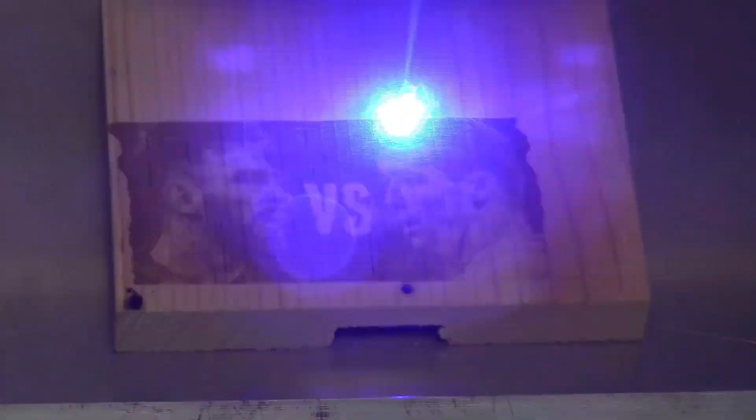Hi guys, today I'm going to start my new project, the laser engraving machine. So this is my final design. I think I might make some mistakes, which I will realize later when I assemble the machine together. But let's just continue. This is the linear bearing I showed you in my last video's design. It's more symmetrical and easier to put together.

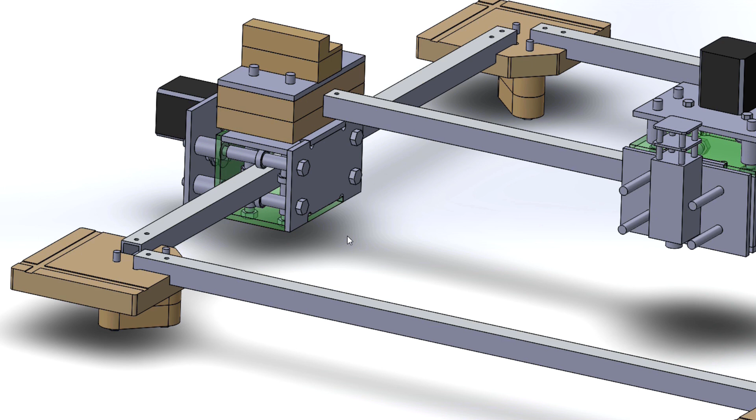But one of the viewers told me one very valid point: this version might have less stability in the rotational orientation here. For this problem, I don't think I need to be concerned on the y-axis here because it has this bar to stop it from rotating. But on the x-axis, it might be a problem and make the machine less stable.

So I might need to put more skate bearings here instead of one only in the middle of the rail. I'm going to put two, each one close to the edge of this tube, so it's going to be more stable in the rotational orientation, and it will work the same in the linear orientation.

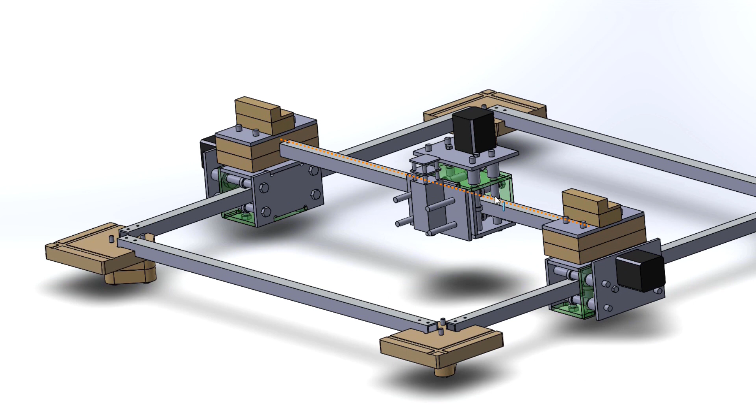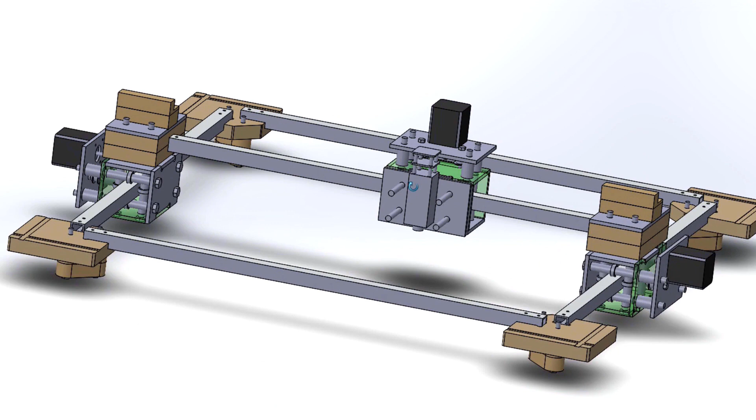That part I don't think I need to show you how to do, because I already showed you in the first version. I'm just going to have three spacers here instead of two, to space out these two bearings, one on this side and another one on this side, so it's going to be easy.

Okay, and the next step is I have to trim the aluminum square tube to equal length. These two need to be the same length and these three will be the same length, but to make it easy I'm going to cut all five of them to the same length. So I will show you my trick to do that.

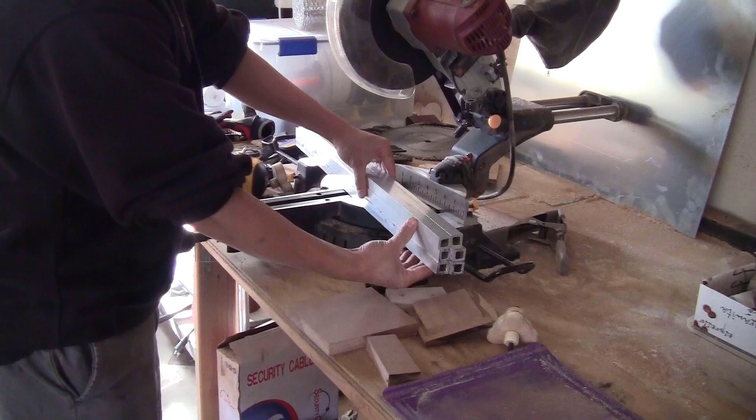Okay guys, so I have here 5 pieces of aluminum square tube which I bought from the hardware store. They are roughly about 25 inches in length. They're not exactly the same though, because you can see here it's not exactly the same on both sides. So what I'm going to do is trim them to the exact same length.

To do that, first of all I'm going to tape them together so they don't move when I cut them. So I'm going to use some masking tape here and tape them really tightly together.

Okay, so now I'm going to make sure that it is well fixed here. I'm going to trim a little bit just on the edge, to make sure that it will cut through all the tubes. So I'm going to do it like this, and I'm going to use a C clamp to fix it down so it doesn't move.

And to cut this, I'm going to use an abrasive blade instead of the toothed one. It will cut more smoothly and safer.

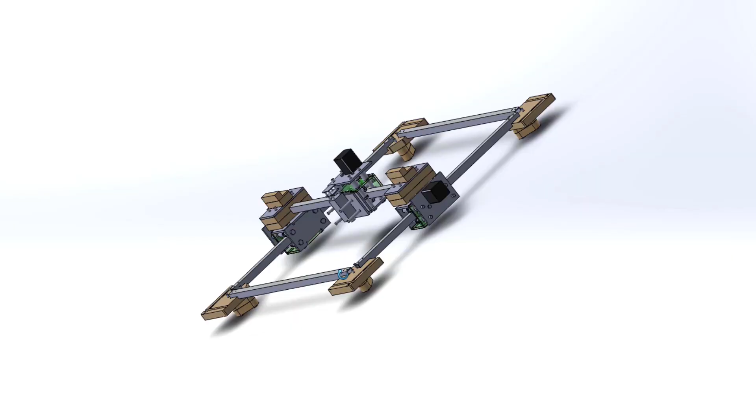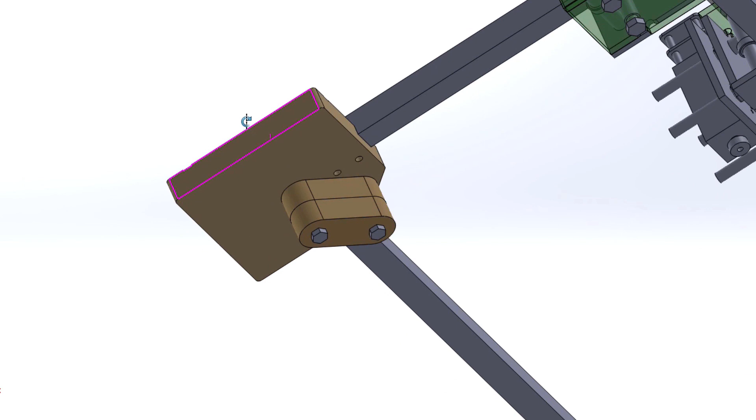Okay guys, so now I have all the tubes here trimmed to the same length. The next step is to drill the holes here, which have to line up with the hole on the corner bracket. Look from the bottom here, you will see the hole here. So I'm going to use some M5 bolts to go through this hole and lock this with these tubes.

At first I thought I'm going to drill the holes at a size of like 5 mm, so the bolt will go through, and use nuts to lock the bolt and the tube here. But I think if I turn the nuts too tight, the tube will be kind of deformed and not going to be square anymore.

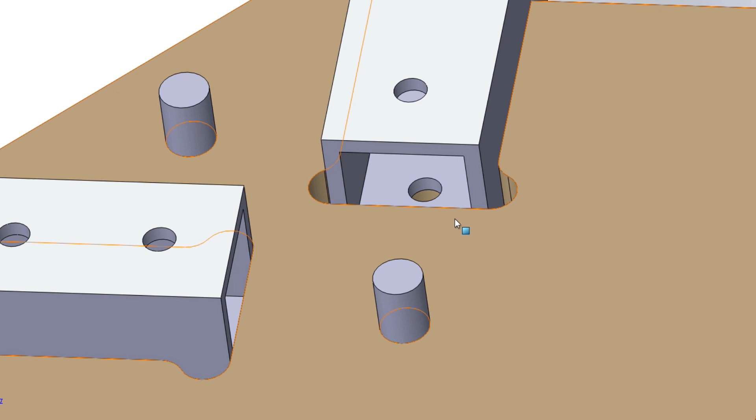So what I'm going to do is drill the holes here with a 4 mm bit, and then make the thread using the M5 tap, and then I can lock it down using the M5 screw. It goes from the bottom and locks with the thread I'm going to create here.

Normally what people do is mark where to drill the holes and use the drill to just drill there. But I don't really trust my hand. Even if I mark the hole, my drill bit might just slide and slip.

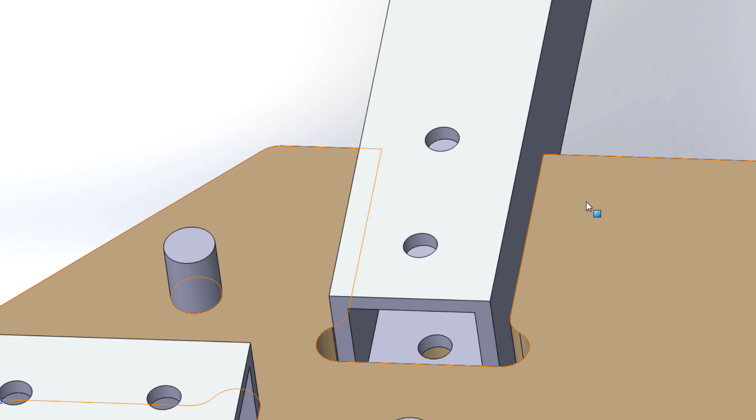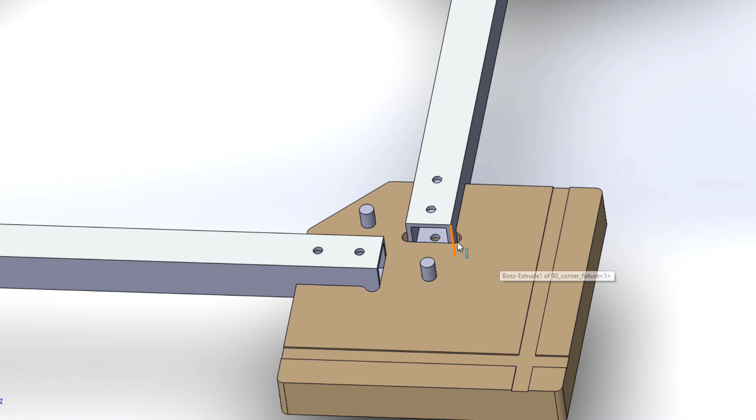So what I'm going to do is use the CNC machine to drill the holes, and I'm going to use a 4 mm bit. Then I'm going to use the M5 tap to make the thread. To do that consistently on all the tubes, I think I will have to design some type of fixture so I can swap out the tubes more easily and consistently every time. So let me just design that fixture first.

Okay, so here's the fixture that I designed. I have the slot here, just long enough I think so the tube is not going to move sideways. And then on the bottom here I have some slots that I'm going to slide some M6 nuts in, and the hole will go through, so I can use the bolts to go through this and lock with the nuts down here, and some bar to go across to lock the tube down, so it's not going to move up

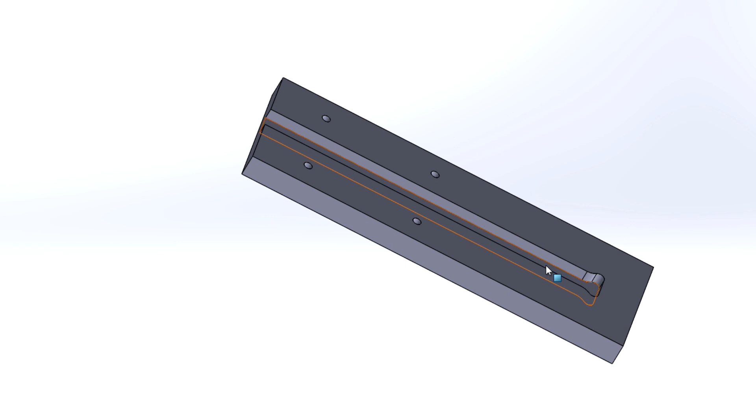and down. So that way it will stay in place, and then I can just slide the tube in, lock it down, drill the holes, so it will be stable every time, and the same on all the tubes. So let me just show you how to set up the milling of this in Fusion 360.

I think I'll only show you the Fusion 360 setup on this one. All the other parts will be kind of the same, and I don't want to make you bored with the process. If you have difficulties on any parts, just let me know. I might post some videos to support this process, but I think it will be easy. So let me just show you this part very quickly.

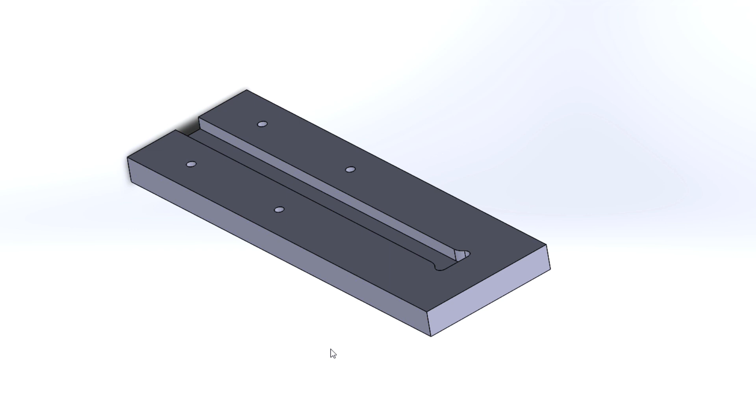Okay, so here in Fusion 360, what I'm going to do is open the part. Just click on open from my computer, and I'm going to choose the aluminum tube fixture for drilling. So I just click on that. Okay, so now this is imported.

What I'm going to do is actually mill the bottom first, those slots and the holes that go through here. The reason is after I mill this, put in the nuts, then I will flip it over and really fix this piece down so it's not going to move. I slide in the tube and fix the tube down, so I have to do it a few times. So I don't want this stock to move.

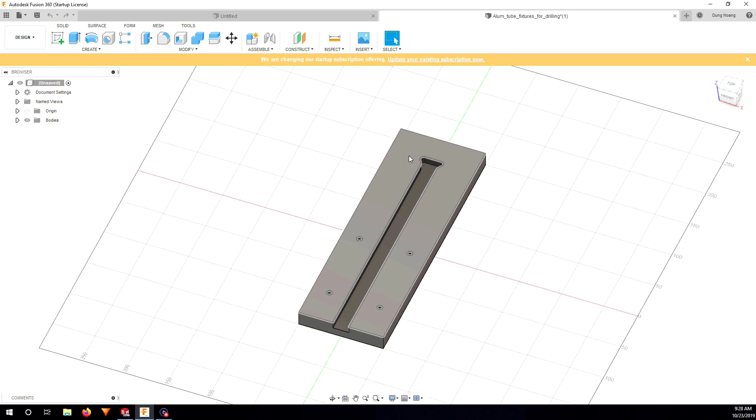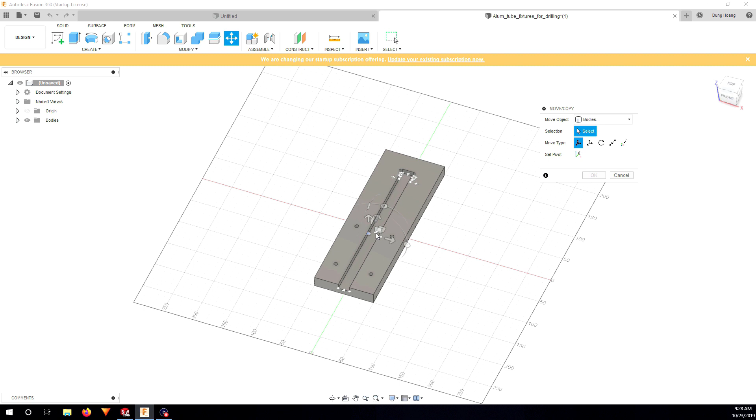That way, once this is milled, it will always be parallel to the y-axis, so it's not going to move, and it will be consistent on all the tubes. So let me just flip it over to mill the bottom first. So just click on this, move and copy to the middle here. No, wrong point. Okay, right here. I'm going to rotate in Y angle 180 degrees. Okay, so now it's flipped.

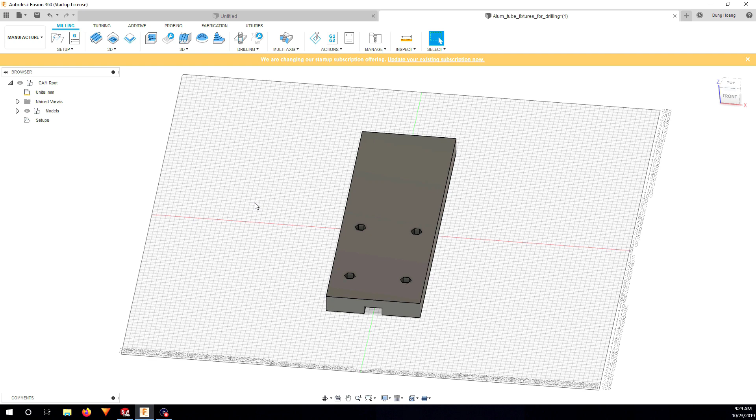I'm going to go from design to manufacture, and then define the stock. So just click on setup and choose the box point. I'm going to choose this one in the middle here, and on this edge. Go to stock. I'm going to put side offset about 5 mm. Actually, I don't need to. I put 0 and 0. So I click OK.

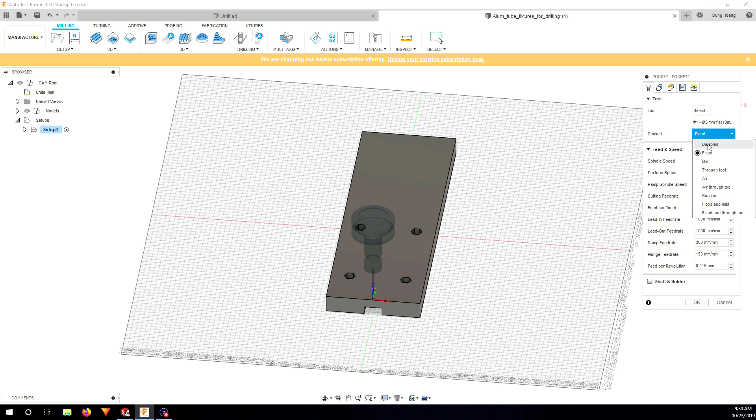Next step I'm going to go to 3D pocket clearing and select the tool. I'm going to choose the 3 mm flat end mill for this one. I don't need to choose anything because I just leave it as bounding box. It's going to find the pocket by itself, so I just leave this like this, and here put 4 2 so it goes a bit faster.

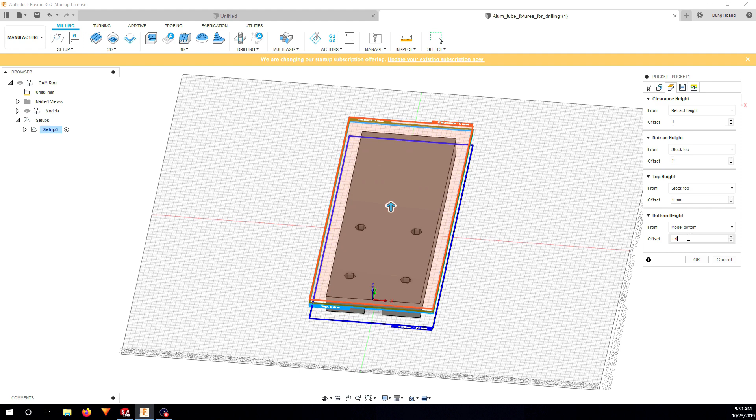This I'm going to drill all the way through, so I put minus 4 mm, and tolerance I'm going to put a bit more precise. I don't leave any stock. And do shortest path, and that's it. I click OK. Okay, so I think it's correct.

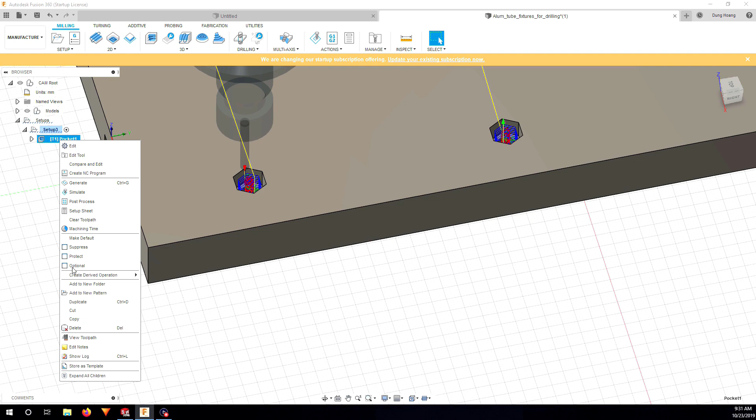Well, let's just check carefully. So it drills all the way through, and here it does the hexagon. So everything seems to be fine. So I'm just going to export this, post process, post. So here I'm going to save it in the folder. I'm going to name it aluminum tube fixture bottom.

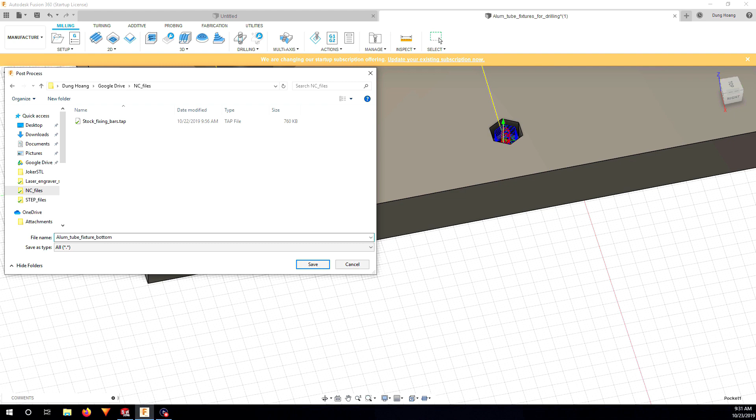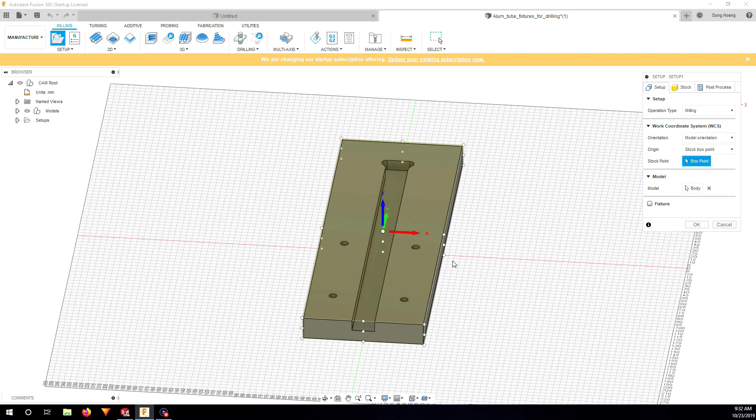Okay, so now the file is saved. What I'm going to do is press Ctrl Z a few times, so it goes back to the original position here. Okay, so it's face up. So now I just go back to manufacture and create the setup, and I choose the same point here. Then I go to stock, I put also the same and click OK.

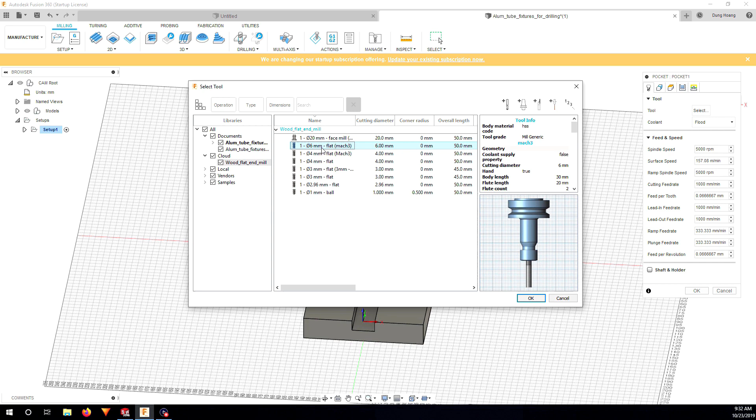Now I also just need to clear out this pocket. So once you set this up on the platform, just make sure it doesn't move, it really stays in place. It has to be stable, so all the tubes when you drill them, it will be exactly at the same place. So I just go to 3D pocket clearing again, and then select the tool. Actually for this one I'm going to use the 6mm flat end mill because it makes it a bit faster, so I click OK. And this one I might just reduce the speed a bit, make it cut a bit smoother.

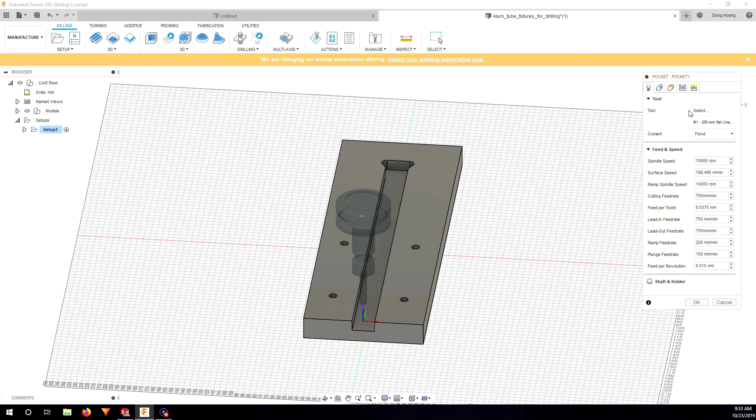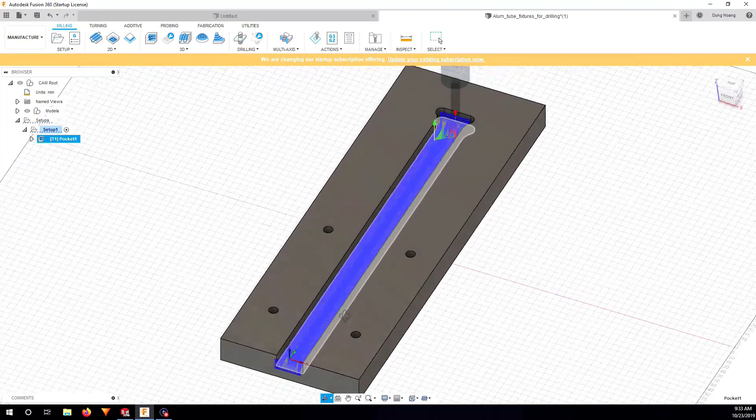Okay, it looks correct. It's going to just mill all the pocket here. So now what I need to do is just export it and go downstairs to mill this. Okay, I'm going to put it top.

Okay guys, so to mill this fixture I'm just going to use this scrap piece of wood. The size of it is about 30 centimeters length, and as long as it is more than a centimeter width, it will be fine. So I'm just going to line it around here, so that way when I push the tube, I will have enough space here. So let me just fix this down, mill the slot for the M6 nuts first, and then I will flip it over. So let's just fix it here.

Okay, so now you have the slot milled. You just take some of the M6 nuts here, just pound them into the slot so they sink inside. I'm just going to take it on the floor and pound it in. Okay, as you can see here, I pounded in the nuts. It's not that hard. They fit tightly in here. The same way I made my wasteboard here.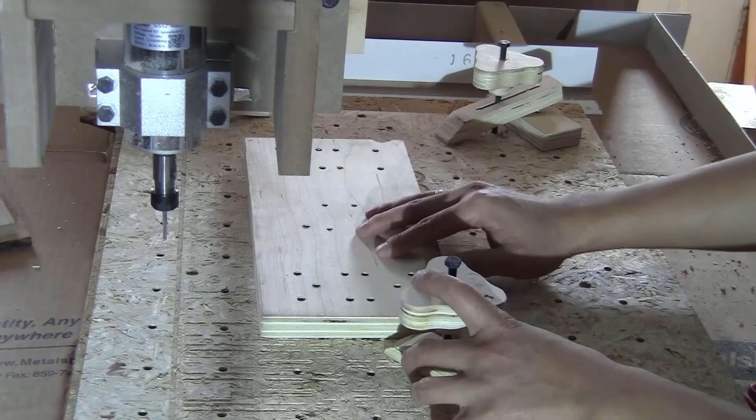So this time we need to really fix it in place so it doesn't move at all when I push the tube inside. And I will need to have enough space at the front, so it should be around here. Okay, so now I just want to really tighten it. Use a lot of this type of setup to fix it down and push on the side, to make sure that it doesn't move anywhere.

Okay, so now I just tried it on different tubes, and they all slide in very snugly and easy to put in. So the size of the slot is good now, so I'm just going to use this fixture to drill the hole. So let's just move on to the next step. Okay, so now I have the fixture ready. I'm just going to leave it on this setup until I am done drilling all the holes on all the tubes. So first of all, I just have to fix a tube here.

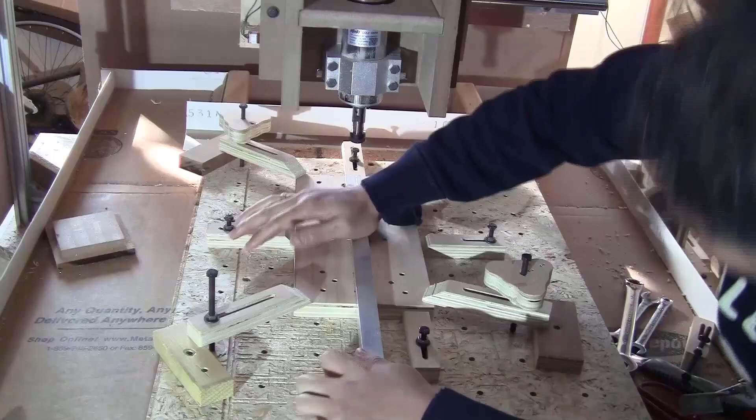Just slide it in. It's not very tight. You can just press it down all the way in this way and down. And now you can fix it down using this setup. Just have the screw down here. Okay, so now the tube is really tight in place. It's not going to move anywhere.

Okay, the next step is very important also. You have to make sure that you have your touch probe properly set up and the edge finding script is set up on your CNC, so you can find this corner. So you can drill it precisely right in the middle of the two holes that you need to drill. So to do this, I just use one of the broken bits that I had before, 4mm shank. I mean, precisely it is 3.96mm. So I just slide it in here and tighten it.

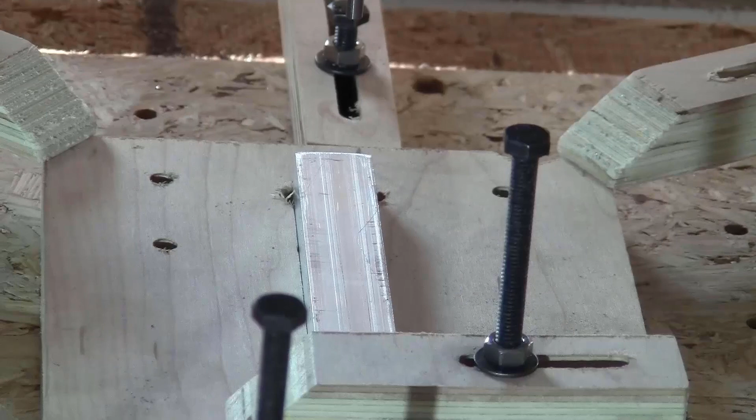Okay, one thing is a very basic mistake that I made. I forgot to clamp the probe here and put it here, so it was almost crashing and breaking things. Luckily I stopped it soon enough. So don't make that mistake. Make sure that you clamp your probe and make it touch the tube.

Okay, so now this corner is found. What I'm going to use to drill the hole is this 4mm drill bit. So I'm just going to put it in. Okay, so now the tip of the tool is probed to the surface of this tube. I'm just going to show you how to set up the drill of the two holes right in the middle of this tube on Fusion 360.

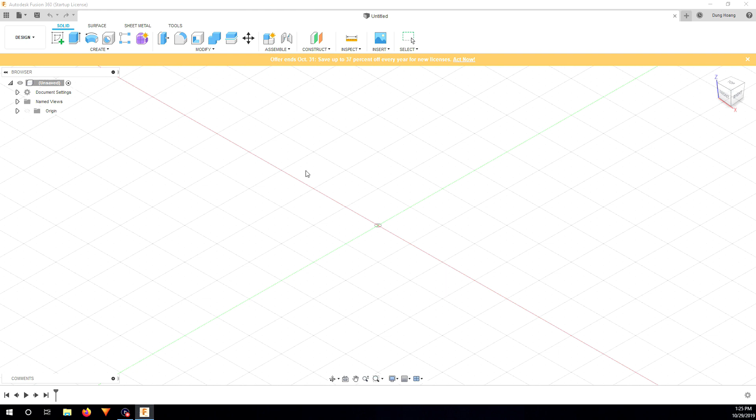Okay, so here in Fusion 360, I'm just going to open the aluminum tube. Okay, so I only need to go to manufacture and create the setup. For the box point I'm going to choose this point, where I used the tool probe to find the corner, and this I put 0 and 0. Okay, and I just click on drill, and here I choose the tool. I already created the 4mm drill bit here, so I click OK.

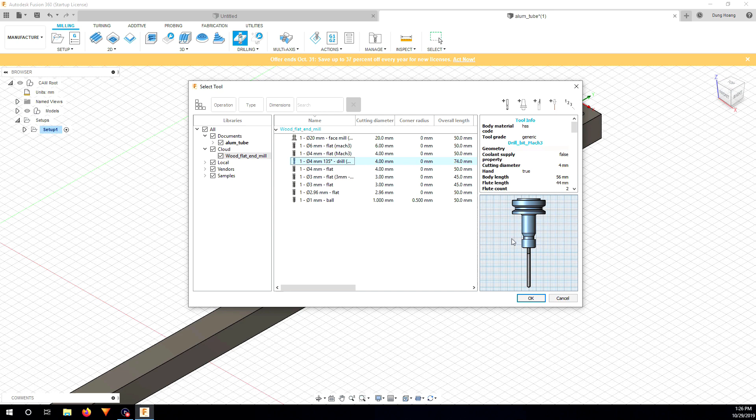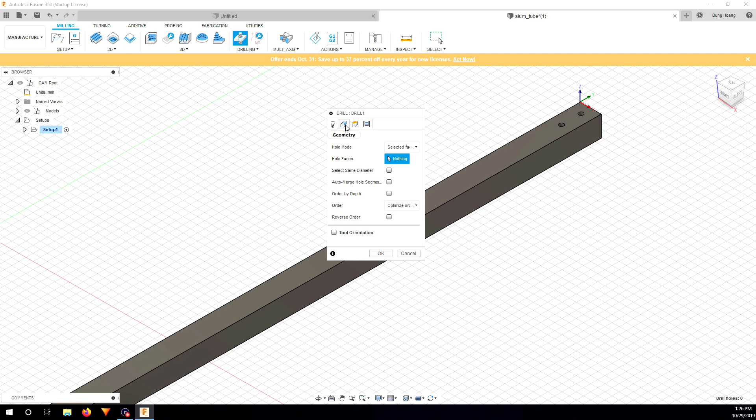And disable this. I'm going to go very fast. I go 10,000 for the spindle speed, and plunge rate I'm going to go very slow, 4mm per minute. To drill through this is about 3mm, so it's almost 1 minute per hole. It's not too slow. And here I'm going to just click on the hole that I need to drill, and that's it.

I go here, don't need to retract too much, and this one I put 0.5, and offset here. Well, first I'm going to check this because I want the drill tip to go all the way through the bottom, and here I put -1 to make sure that it drills through. Like this, it's going to go through because the edge here is about 1/8 of an inch, 3.1mm. So that's it. I click OK. Okay, so now the drill is set up. Let me just show you how it drilled downstairs.

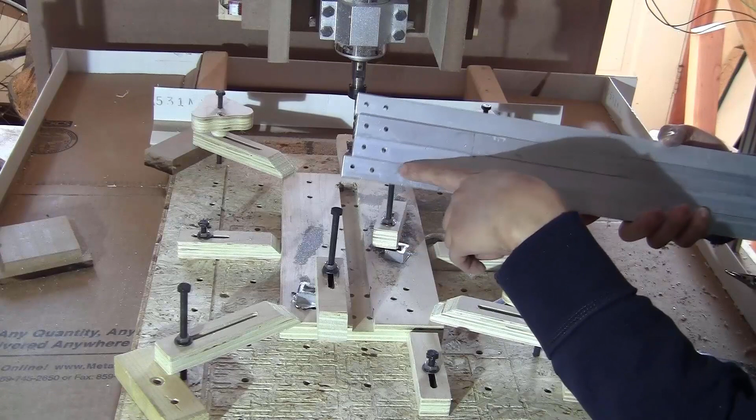Now I have all the tubes drilled the same way, so the holes are at the same position. Next step is I'm going to start to mill all the other parts, especially the corner bracket, to make sure that the holes are lined up. And I also have to make the thread on this. Okay guys, so while I'm waiting for the corner bracket to be milled, I'm just going to make the thread on those holes, and then I'm going to use the M5 bolt 0.8mm pitch to test the thread. So I have the M5 0.8 tap here, so I'm just going to do one by one.

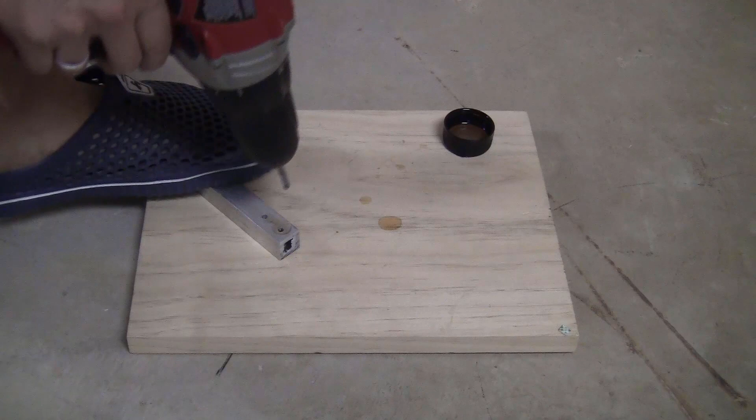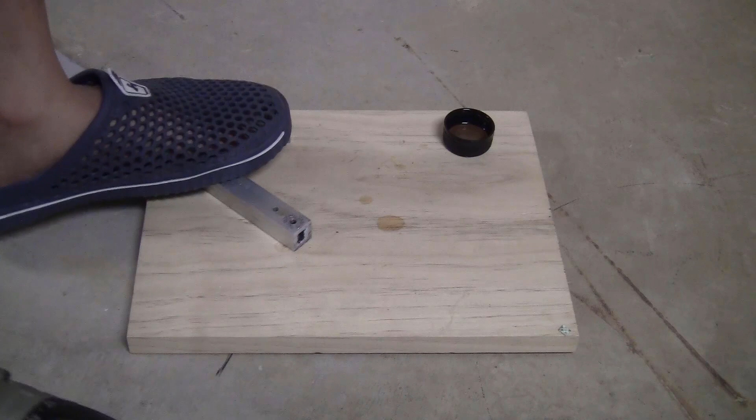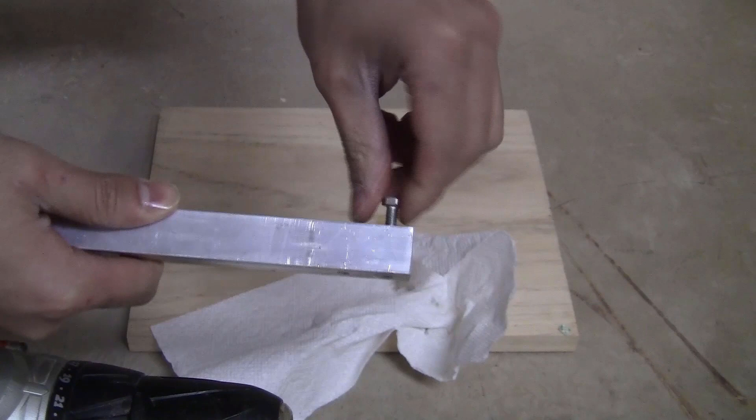So first of all, I'm just going to put some cutting oil on the hole, around the hole. Well, I put too much, but you don't need that much. You just need a little bit, so I just spread it to the other hole. Okay. Then just step firmly on it. You don't need to go high speed, just go actually pretty low, so it will go through. And when it bites, it just pulls it down by itself. Wow, perfect. So now the thread is done on this hole, so I just do all the other holes.

Okay guys, so last time after threading all the holes with the M5 tap, I found out that on some of the holes the screw just slid through the thread without any kind of friction, so the thread wouldn't cut well. So what I did is I had to run outside and buy a new set of taps that is a lot better, and I made the holes bigger, and I used the M8 tap to make the thread here. So I had to redesign the corner bracket and make the holes here bigger.

I also put some slots here to install the belt, which I will show you later because the belt installation is the last step. So for now the holes are bigger, but actually with the design that I share with you, I still keep it at M5. Because if you need it to be bigger, just use your drill bit to drill them, or you just change the design yourself. So feel free to change whatever you need for the material you have. So now I'm just going to show you quickly how to install those clips on the brackets.

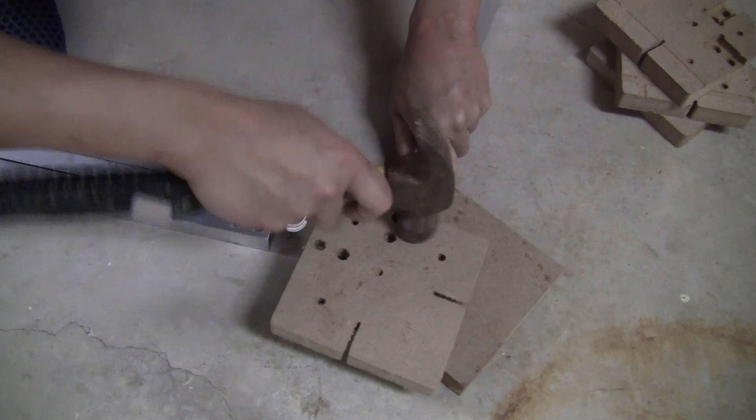It's actually a bit tight, and I actually like it this way because this way the clip will kind of stay snug inside and it's not going to move in and out. And I'm just going to use the hammer to tap it down a little bit like this, and just tap it all the way in.

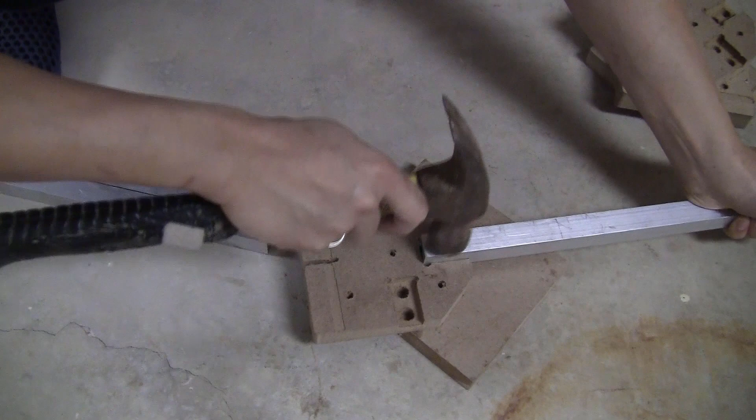So the holes are lined up kind of perfectly. I don't know if I can show you here. You can see that the holes are lined up. So I only need to take some of the M8 bolt here and then just tighten it. Okay, so it actually stays really tight here. So I don't think I need the bracket on top to reinforce it. I think this is enough.

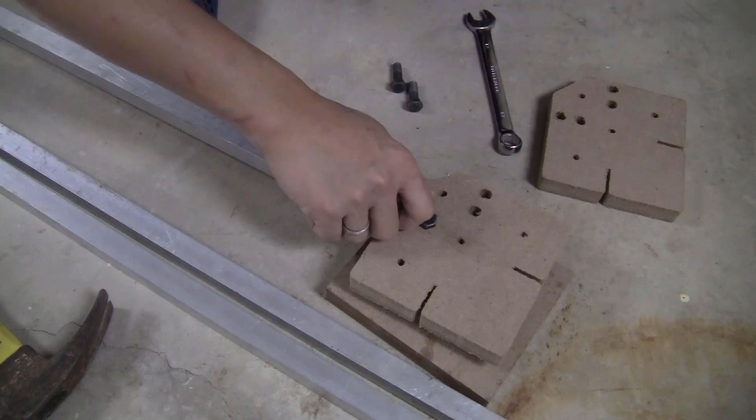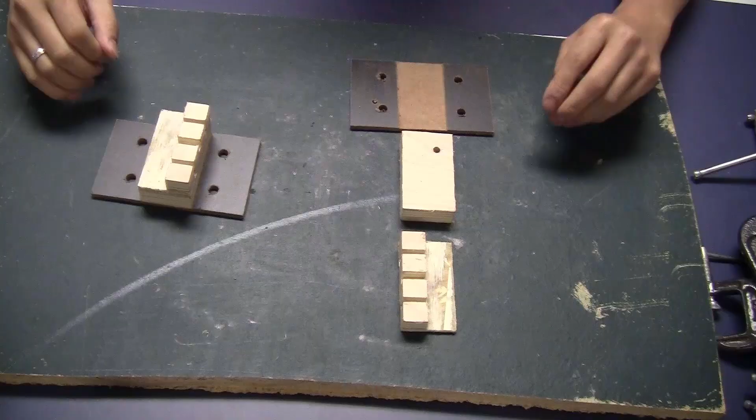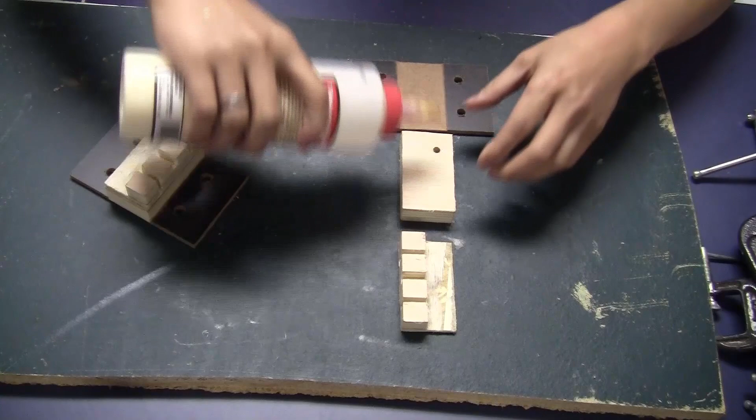Okay guys, so after testing the tube and the corner bracket, they were good. So now the next step is I milled out almost all the pieces I need for the laser engraver. And one of the steps is I need to glue some pieces together like this to have a big piece like this structure. So what I will do is I'm going to use some wood glue like this, and I just pour it on this piece.

Just spread it out and press this on, and then on this put a bit and put this piece on top. It doesn't matter which way you put it, they are all symmetrical. So you can turn it one way or the other when you install it. So now you just need to clamp it down.

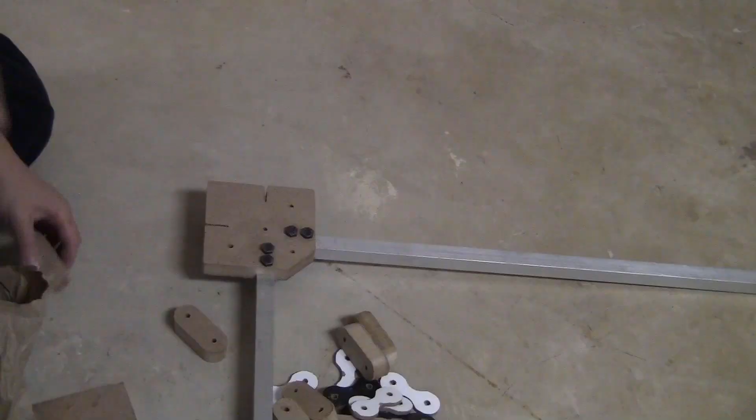Okay, so while I'm waiting for the glue to dry on the other piece, I've got to install the legs on the corner bracket. And to do that, first of all, just flip them over like this. So once I changed to the M8 bolt and M8 thread, I didn't realize that I reduced the space here, and the fit that I designed at the beginning doesn't fit anymore.

So what I did is I made some of this type of spacer so they can slide in here. So just lift it up a little bit like this, and then I install the piece on top like this. So I can still keep those, and I just need to make some of this. So if you still use the M5 or M6 hole as in the original design, you don't need these pieces. So for me, I just use some of the 80mm M8 bolt. So I'm just going to slide it through the fit. Well, I should put some of the O-ring on first.

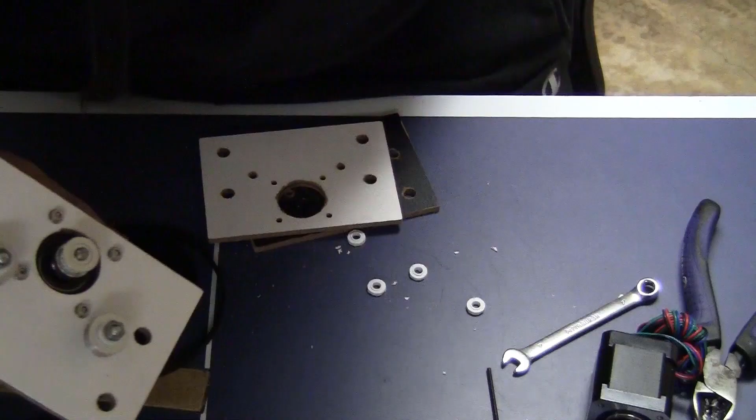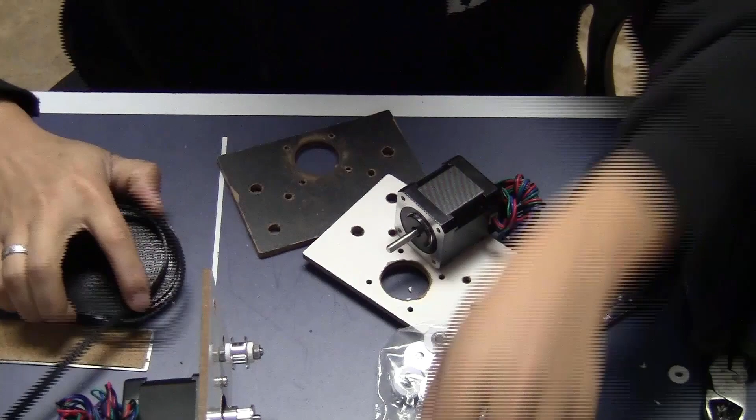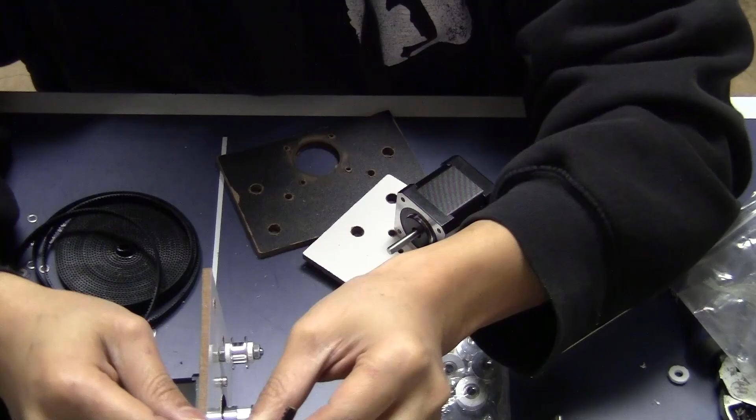Okay guys, so before putting the linear bearing setup together, I have to set up the stepper motor mount first. So it's going to look like this. So what you need is a NEMA 17 stepper motor, this plate that you mill down, and some of the spacer for the pulley. This type of pulley is for a GT2 belt, like this. It's 2mm pitch, and you also need a belt for it. So all of this is on AliExpress for very cheap.

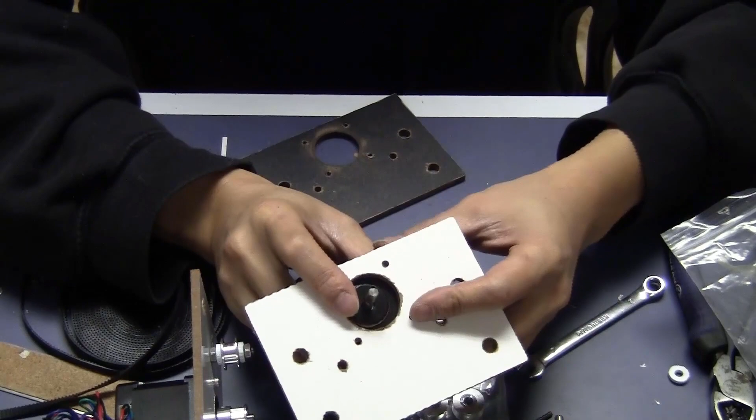So what you need to do is, first of all, take this and put it in like this. So you just have the motor mount here. Then take some of the M3 bolt here, 10mm length, and use the washer and slide it through the hole here and mount it.

Okay, so now the stepper motor is tightened. We need two of the M5 bolt, 28mm length. So just slide it through these two holes. Okay, and then just tighten it with the nuts.

Next step, just slide on this spacer for the pulley. I have the small ring just to push the inner part of the pulley. So like this, take out two of these, slide them on, and put another spacer here and tighten it with the nut. You don't need to tighten it too much, just enough so the pulley can still roll freely.

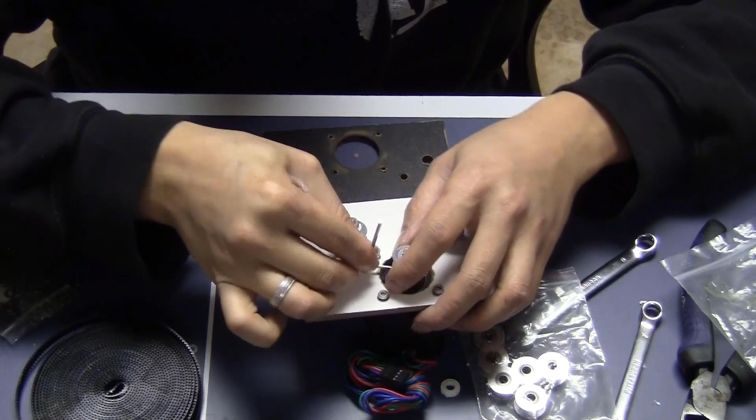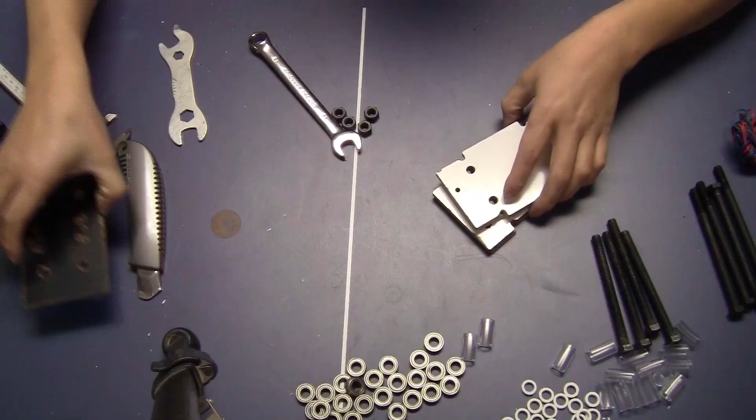Okay, so you will need like 3 of this setup: 2 for the y-axis and 1 for the x-axis. Okay guys, so I'm just going to start to assemble the linear bearing now. First of all, I'm just going to start on the linear bearing for the x-axis.

Okay guys, so now I have all the parts ready. So I'm just going to assemble the linear bearing setups, starting on the linear bearing of the x-axis. As you can see here on the side plate, I have 2 pairs. This pair has the distance between the holes a bit shorter compared to these 2. So I'm just going to take this one with the long distance here, and I take the M8 bolt

110mm length. And the reason I use those is because I tried to find one that's fully threaded, but the store that I went to didn't have it, so I had to take this one. This part is not threaded, but that's fine. So 110mm, just slide them through here.

Okay, so next step I just take the vinyl spacer with an inner diameter of 8 millimeters and slide them on here. The length of those spacers is 20.5 millimeters, but I cut them roughly 21 millimeters. That should be fine. Okay, so the vinyl spacer is on. Then slide on one of the hard plastic spacers. The small inner ring here should face up.

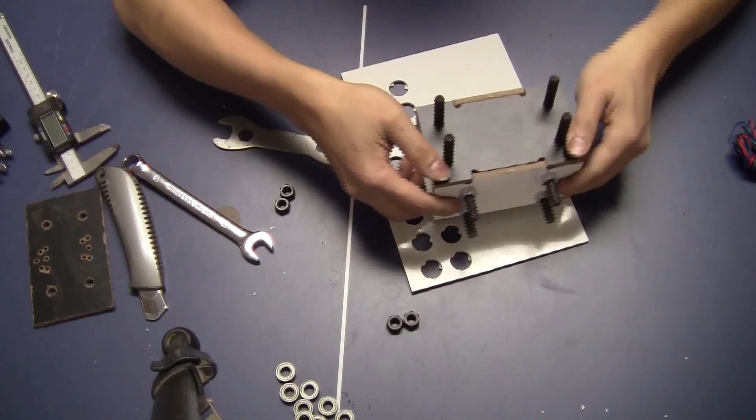Okay, so now I just slide them together like this, and pair up like this on this side. Now on this side I'm just going to lock it with the nuts. This side is roughly locked, so I'm going to lock this side too. This part will need some spacers, so I'm going to use this. Push it down. It's kind of tight, so just force it a little bit. Some are easy.

And then there's a 19 millimeter one, and then you need another 5 millimeter, because in total you need about a 24 millimeter spacer. If you have something that is exactly 24 or 25, you can just use one piece. But I only have 19 millimeter and 5 millimeter, so that's what I use. On this side right now, you can lock them temporarily with the nuts, or you can also just install the motor mount here.

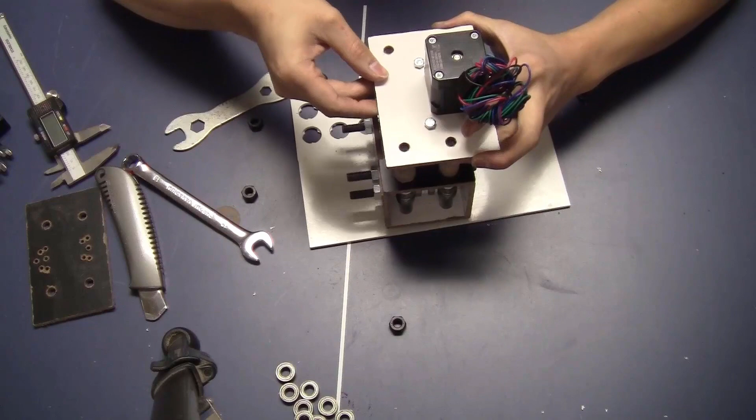So this part will be the laser, and this part will be the motor. I just slide it in here. The motor faces away from the laser, so you have more space in front. Okay, so now I can just lock it down with the nuts. Now everything is tight. We have the motor on, so it's ready to be motorized.

And then this plate is to mount the laser. I already have all the holes here to mount the laser. Later on I'm just going to slide it on like this when it's ready to be mounted, and lock it with the nuts like this. So right now I just leave it like this.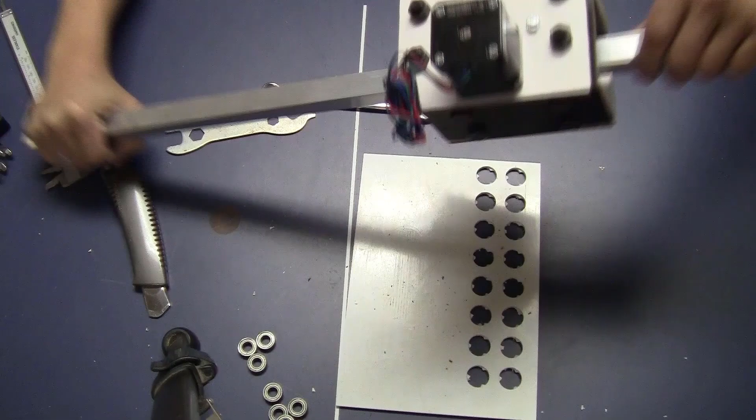Let me just test with the tube to see if it's tight. Yeah, this is really good. It's really tight, and it still slides very freely, no problem, no play. So this will be good. It's ready to be installed on the x-axis. Let's move on to the y-axis.

Okay, for the y-axis, it's just a bit different. The side plates are the same, but the type of screw will be different. I have 110mm length and 125mm length. The nylon spacers are a bit longer: they are 26mm, not 20.5. So that's it. Let me just put them together quickly. On the long distance hole plate, just use the 110 and slide it through like I did last time.

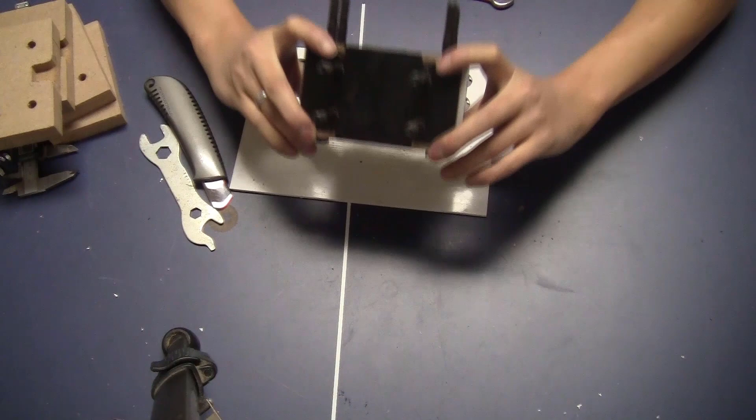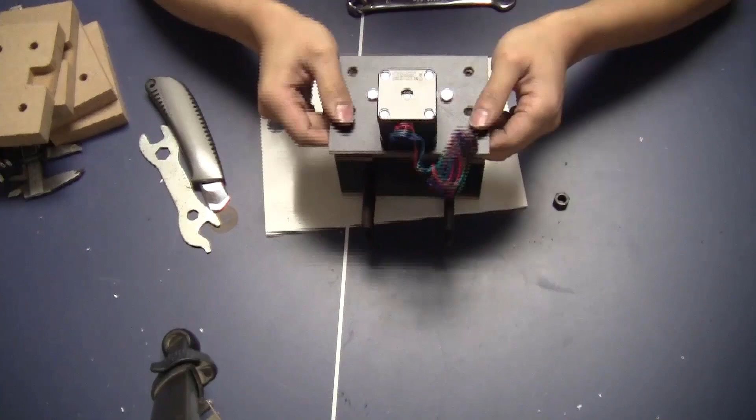Okay, so now they are in. First of all, on this side we need some of this type of spacer again to mount the motor. And on this side, for now I probably just lock them temporarily because I don't want to put the motor on. It's a bit heavy. I will install it later. Or whatever, I just want to put the motor on. So this time, this is the upper side, so I just want to put the motor up here. I'm going to really tighten it later.

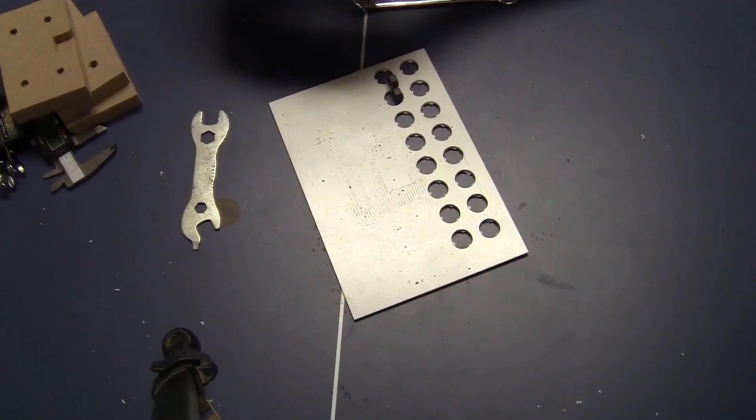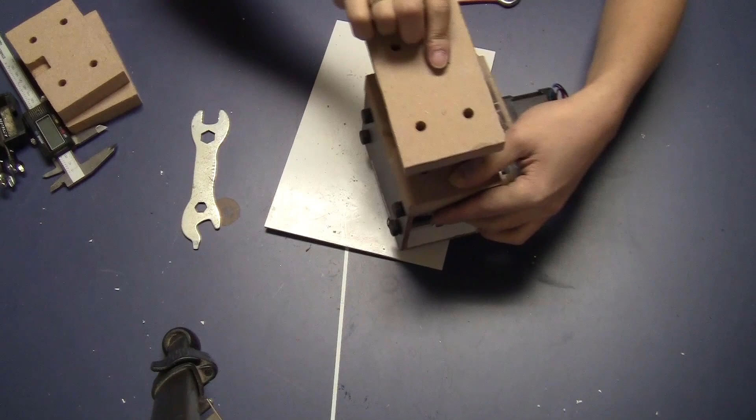On this side, what you need is just the plate, just where I'm going to slide the aluminum tube in here for the x-axis aluminum tube. So this, I'm going to just slide this on into the bolt. Okay, like this. It's really tight. I'm not going to tighten the bolt right now. I just leave it like this because I need to install the bar here for the x-axis, and then I'm going to have to slide this on and clamp the tube in between here, so it's not going to move. So I will do that later.

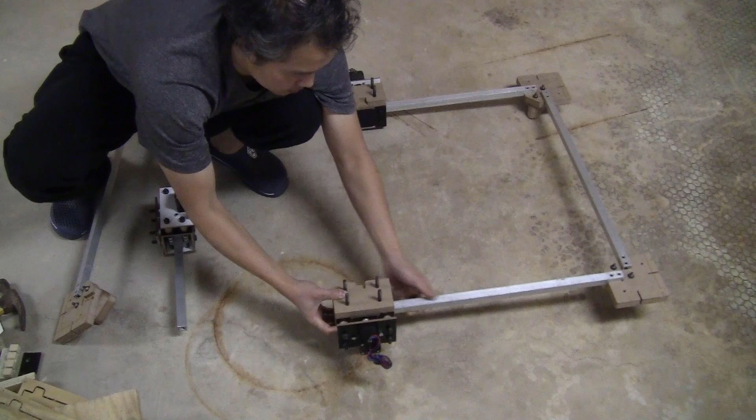Okay guys, so now I'm just going to slide on the bearings here on the y-axis, one on this side and one on this side. Wait, so now I'm going to have to fix this on here. Okay, just going to have to lift. Well, I probably just fix this in first. So let's just take this out, move this all the way to the back, take this out and slide it in here.

Now, what I'm going to do is just install this. Okay, so now the two pieces, I just glued them together earlier. So just put like this. Okay, final step. I just want to use the nuts to bolt this down.

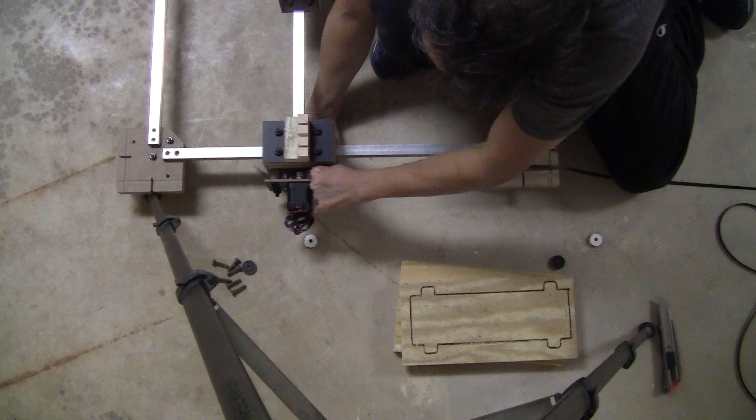Okay, so now to run the belt, I just go underneath the pulley, go on top of the gear and go underneath again. Okay, pull it on this side. Okay, so now at the legs here, at the corner bracket, I just go underneath, pull this up, wrap it around here, and go around here, and then try to pull it from underneath really tight, and then press it down here on top of itself, so the gear is going to just lock into itself.

Now I just have this piece, and I just put this like this. So now if I bolt it down underneath, it will lock here, press it down, so it's not going to move anywhere. That's how I do it on the gear on one of the brackets. So I just do the same on the other one. It's just I need to pull it really tight.

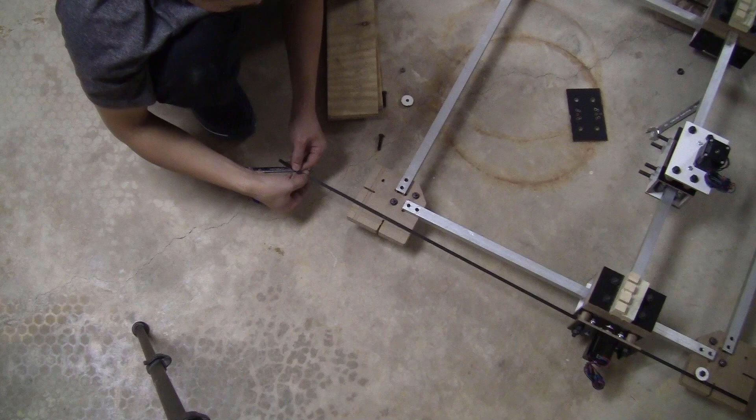So on this end, I can do the same, but I feel like if I run underneath and lift this up, it's not really tight. So the belt tension is not really good. So what I do is just cut a piece of the belt here. And I'm going to clue this right here in the slot here. Okay.

So now I just prepare the bolts and nuts. I pull it really tight and press it down here. Okay, and I slide this through and press it down and lock it with the nuts underneath. Okay, so now the belt is tight and it doesn't move, so I can just trim this off. So I just do that for the other side of the y-axis. Okay, so now I have the belt installed on the y-axis. I just need to install it on the x-axis.

Okay, so to run the belt on the x-axis, I'm just going to do the same as the y-axis here on this side. I just go loop around this, and then I can pull this down and press it down here, and then I'm just going to slide an M6 bolt here, put in the washer, and then tighten with the nuts. On this side, I'm just going to glue the piece of belt here. Well, now I just have to pull this real tight, real hard.

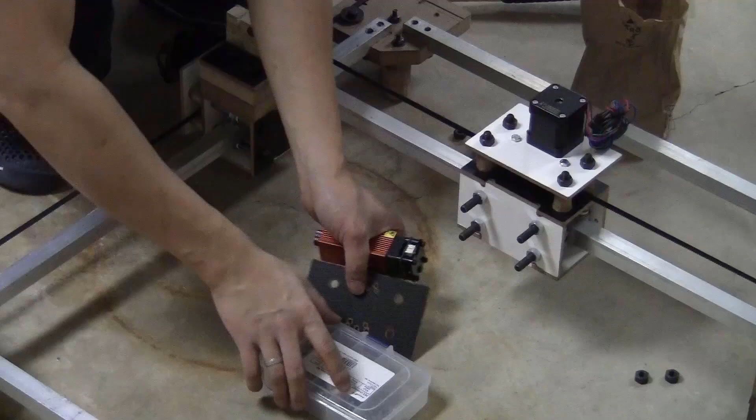Okay, last step, I'm just going to install the laser on this. Okay, now to install this laser head on this block, I just have to take this piece, and probably around 8mm length should be fine. So I take this out, get some washer.

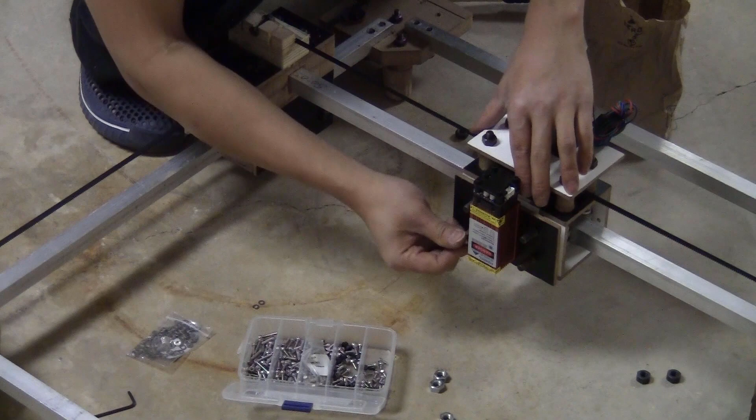Okay guys, so now I'm just done building the mechanical part of this laser engraver. Everything moves smoothly, very tight, and I think it will work well, but the video is long enough, so I'm going to put the next step, like the wiring of the stepper motor, the laser configuration on the control board and stuff, and also testing how this works, in the next video.